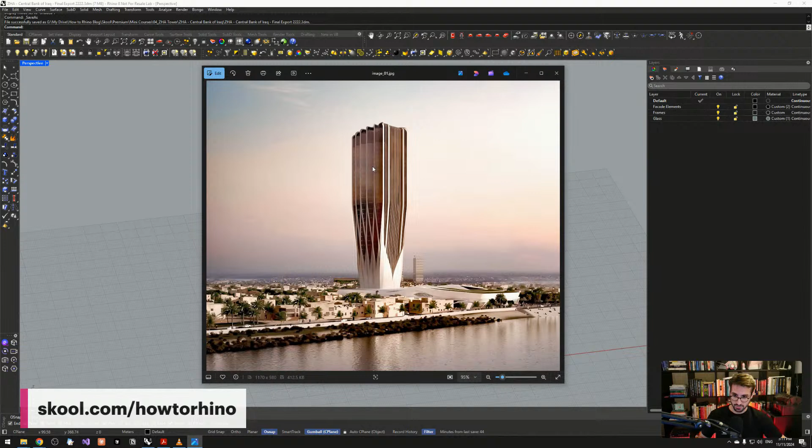Okay, so this is the reference project, as I mentioned. It's placed in Iraq. And this image is most interesting for our live session, because this part of the facade we'll try to recreate. Once again, we'll not try to recreate it, we'll use it as inspiration for our Grasshopper project.

And now I will try to explain first how we are going to create this one. This image is most interesting because we'll try to model something like this, and we'll position it all around the facade. So we'll not have this part here. The top part will be different. Maybe I can share the final result right now, so you can see how it will look once we finish everything.

So I'm going to open the final script. You can see our script will look like this at the end. And once we finish, it's going to look like this. Let me go to monochrome. So we're going to create this kind of form. Okay, and now I can start explaining each step. So what will be the first step to create something like this? As I said, this is not the same as the Zaha project.

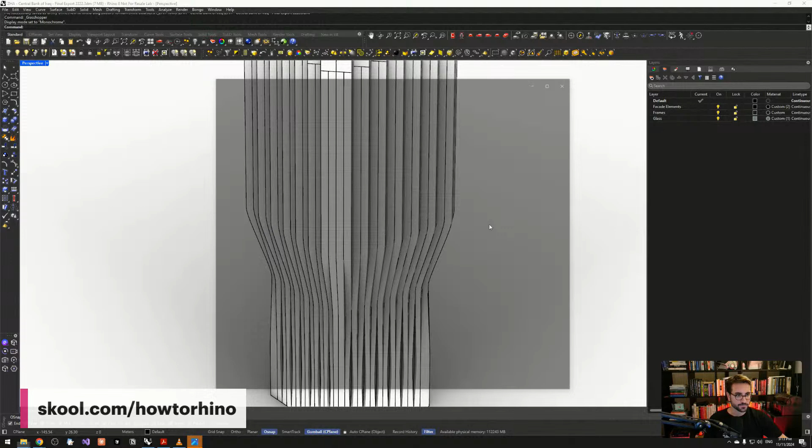Okay, so now I'm going to open the project once again. So, the reference image, and I will explain first how we'll try to create this one. First, as we can see here, we'll focus on just one element that will be multiplied all around.

Okay, so this is the element that we are going to recreate. So first, we'll try to create this element. And how we can create this element, I will explain steps here. So first, the logic behind it is to create this element. Then we are going to multiply this element on one facade. And once we create a single facade, we need to position it on 4 sides, right?

But once we try to position it on 4 sides, we'll have a problem with the corners. So you can see the gap here. So we need to fix these gaps. And in order to fix these gaps, we need to modify the corner elements. Once we modify corner elements, we can multiply this one facade at each side, and we'll get something like this.

After that, we'll scale the upper part. Then you can see the difference between these two. So from the straight lines, we'll try to make a fluid shape, to look more curvy. So we need to find a way how we can transform. In this one, we'll have a lot of issues here. I will explain later. And this is probably, I would say, the hardest part to create the facade.

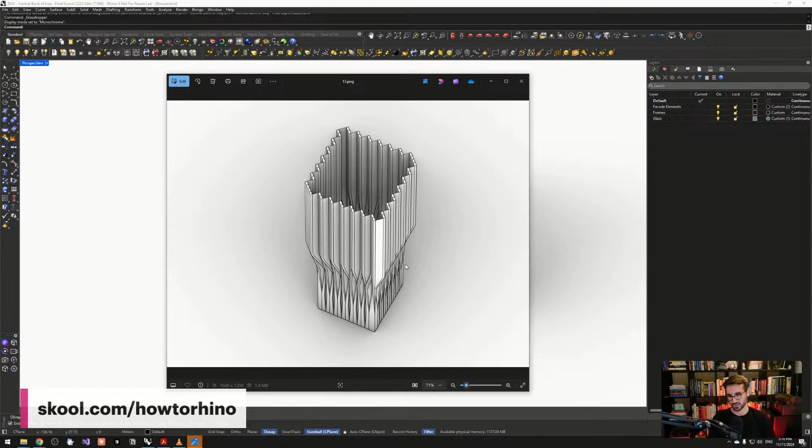So from this stage to this one, we'll have, as I said, a lot of challenges to overcome, and we'll work a lot with the data trees. We need to manipulate, and we need to create the pairs of branches. We need to sort branches first, then to create the pairs, and so on. I will get to that part later. Probably tomorrow we'll create the facade.

Then we need to create the top part, make a glass on the top, and we need to merge these glass surfaces in the next part. And once we merge, we can create the frames. Okay, so briefly, these will be the steps. Now we can focus on creating. So let me start here. How to create this single element?

Yeah, today. Okay. For today, we'll probably finish here. So this will be the end, the final geometry for today. So this part. And let me go back here. Now let's focus on how to create this element that needs to be multiplied on the facade. Okay, I will go back here, and let's focus on that element. Just find the right image.

As I said, this element we need to create. But to create this element, we need to find how this element is created. Well, actually, if we take a look, the rectangular shape is the cross section, but there are 5 different positions, or 5 different heights. These ones. So here these 2 rectangles are touching each other here as well.

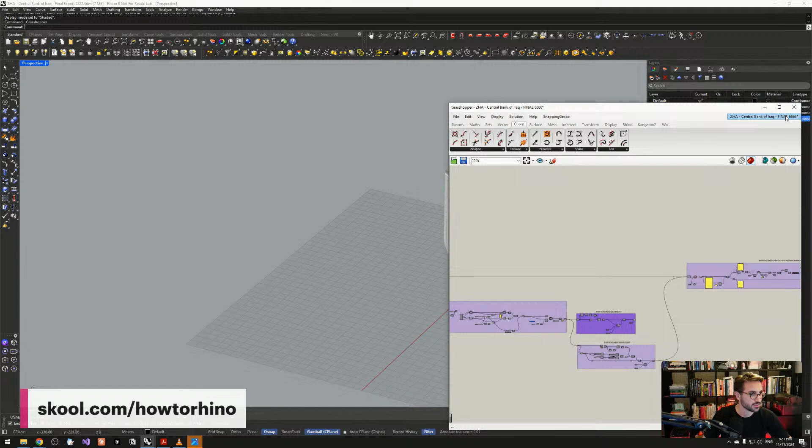Okay, let me go back. I will turn this off. Open Grasshopper. Open a new file. And first we need to create pairs of rectangles. Let's start with a single point. This point we will position somewhere in the space.

And now let's create a rectangle. I will use component Rectangle. And for the rectangle, we need 4 different, actually in our case, we need 3 different inputs. I will turn off draw full names. And let's create a plane. Plane will be at XY plane. And also I will add the possibility to rotate this plane if you want. Later on, based on this plane, we can rotate the whole geometry.

So I'll use Rotate Plane. I mean, this is not obligatory. You can do without this part, but I just want to add the possibility to rotate if you want. Okay. And let's set, I don't know, let's say 30 degrees. And don't forget to check here degrees. Okay. Once we create the plane, we need to set the dimensions for the rectangle.

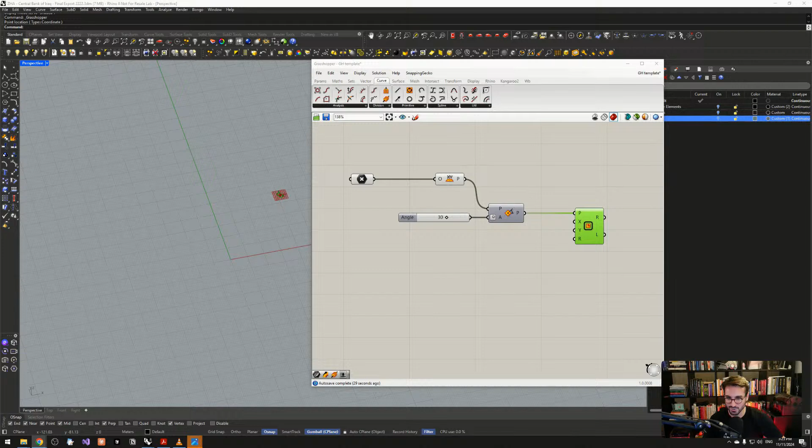We forgot to install here the Sunglasses plugin. Maybe we can on the break, to show the name of each component. Yes, this is what Walter said. Can you turn on Bifocals? Maybe you can install Bifocals from the package manager. Or Sunglasses. Yeah. No, we don't have Sunglasses here. Let's see for the Bifocals. No, we don't have. Maybe we can install this on a break, or maybe right now we can install. Yes, please. Thank you. Okay. Now give me a few minutes to install the plugin. Sorry for.

Okay. Here. Rhino. I prefer plugin Sunglasses over Bifocals. Login, download. Do you need to log in on your account here? Okay. Sunglasses. You need to restart Rhino. Okay. Yeah, we need to restart. But I will just save this project that we created. I mean, just a few components we created. Sorry once again for this.

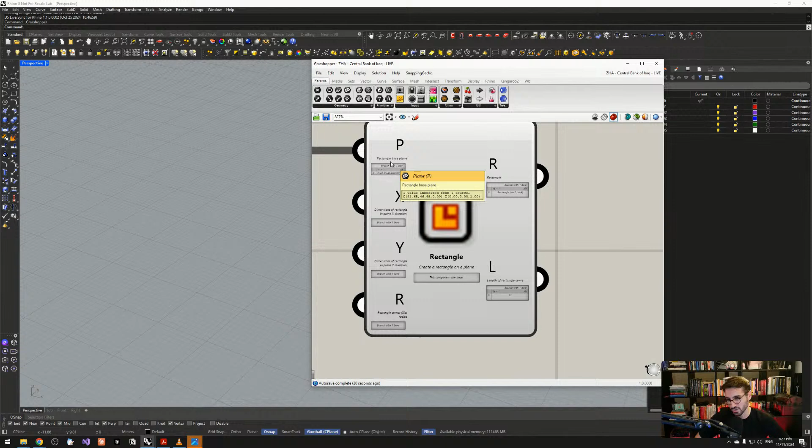Great. Now we have the names of the components, and what Walter said, you can zoom in here, and we have the possibility to see the number of branches, what is inside of the component, and also all the inputs and outputs. All right. Sorry, we didn't create a rectangle yet. We need to define the sides. So for the X and Y, we need to place a domain. So I'm going to Construct Domain.

If you want to keep this point as the center of the rectangle, what you need to do? Basically, you need to create a domain. So if you want to have a rectangle with the sides 5 and 4, you need to place here minus 2.5 to 2.5, because this point here should be in the center, and in total this dimension will be 5. Same here for the y. If you want it to be 4, you need to place the domain from minus 2 to 2, and this will be the rectangle. So in our case, first let's create a slider,

and maybe our rectangle can be 1 by 2. So if you want the dimension to be 1, you need to divide by 2. So I'll use Expression. For all of you who use draw full names, make sure to rename: instead of variable x, place just x here. And in the expression, I will type x divided by 2. Okay, and let's create a domain. In our case, this will be from minus 0.5 to 0.5.

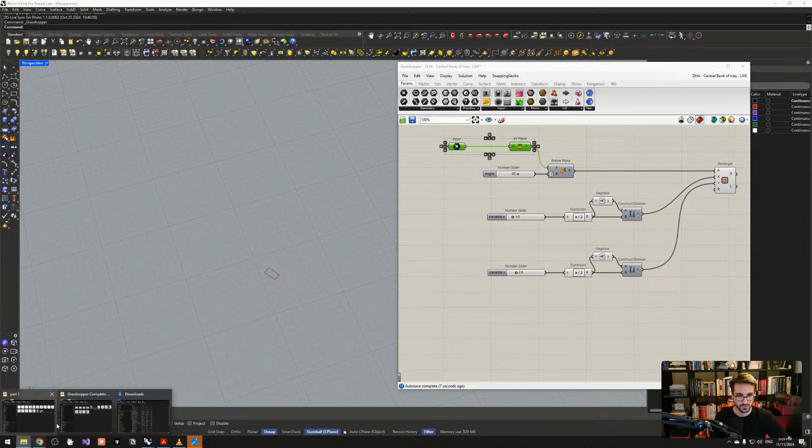Okay, and another dimension can be 2. This is the first rectangle. Okay, now, if you remember, let's go here. I need to create something like this. So another rectangle that should touch this one along the shorter side. So let's use component Move. We need to move this rectangle, and the translation vector we can get from here. So we need to Deconstruct this plane, and the vector should be y or minus y. All right.

So let's use component amplitude. So to take this vector, so y, and amplitude will be dimension, so larger dimension or length of this rectangle. This one. Maybe we can move this on the bottom, something like this. Okay.

So we created 2 rectangles. Now we need to position these rectangles at 5 different heights. Once again, why we're using 5 different heights? Because we need to have 5 different positions in order to create loft geometry and to create this element. But first, sorry, we need to combine these 2 rectangles inside one data tree. We'll use entwine, and now we should use move. So let's move this.

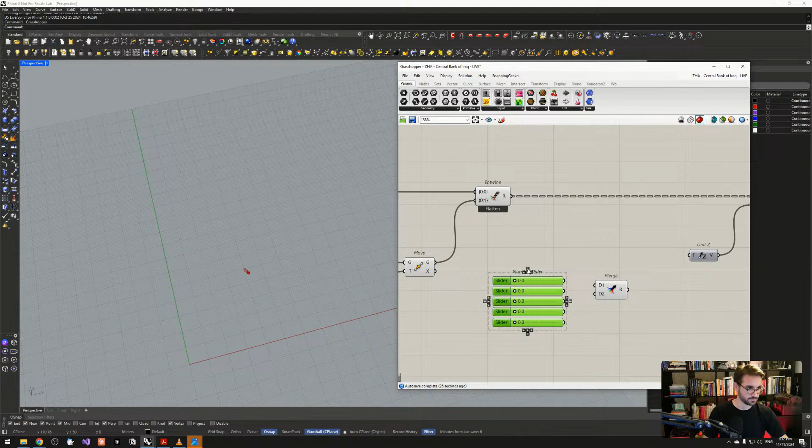And how we can move them at 5 different heights? We need to use, of course, unit z or vector z. Let's create a slider. Of course, we need to have 5 sliders for 5 different heights. Let's align them. So one option is to, let's say, second height will be, let me check, I already have prepared here, so 20.

One option is to do something like this. So this is first, second, third height can be added 30 to the previous one. So one option is to use addition and to create like third height. Then fourth height can be used to add on the previous one second value. So this is one logic, but logic that I prefer, with less components, is to delete this one. So I'm going to place these guys inside one list.

And instead of using addition to some values with the previous value, we can use mass addition. And what we have here in the partial result, basically, it takes the sum before, let's say, index 3, which is 20, and it adds value 30, and we get 50. Then for the index 4, the sum was 50, and it was added 30. So similar with addition, but with less components. Okay, and these are the heights that we need to place these guys. So this was the second step.

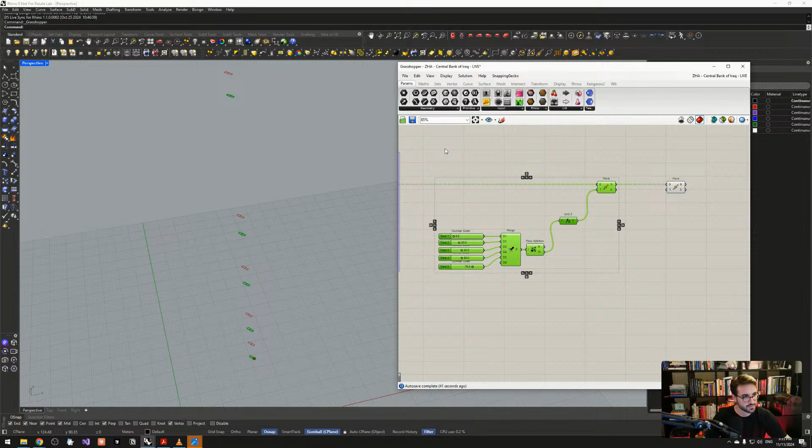But sorry, I forgot to make groups, so it will be easier for you later to find what is each step. So this one will be, let's say, create pair of rectangles. Okay, first step. Second step, to set heights. I still need to use this keyboard. Set rectangles height. This part here.

Okay. Now we have a step to create a gap for the third pair of rectangles. So once again, I need to use move, and here we need to have 5 different amplitudes, but actually 4 among 5 amplitudes will be 0, and only for the index 2 we'll give an amplitude which is not 0 in order to make a gap. So let's create 5 different values. Maybe I should turn this off. Only for the index 2, this part here, we should add the amplitude.

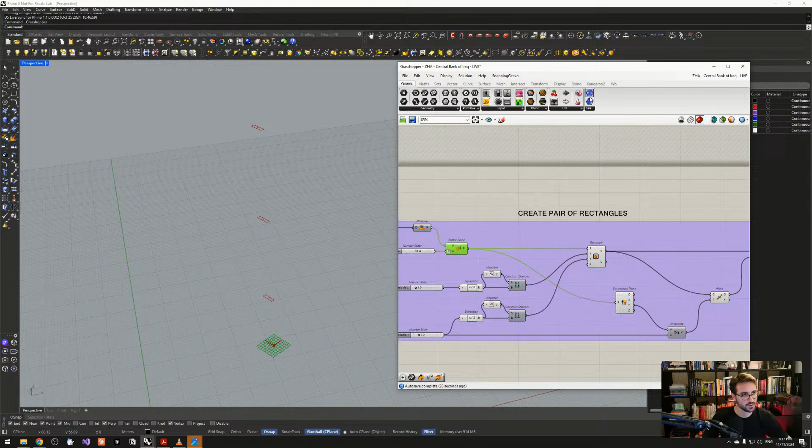But we need to know first what is the vector, and also some rectangle should be moved by 2, another rectangle should be moved by -2. Okay, vector, we can take a look here, should be along x or -x from the base rectangle. Maybe we can create here remote sender. We'll use it later a lot. So I will call it base plane.

And we can use receiver, base receiver, and I'm going to deconstruct this plane and we'll use X. So amplitude will be X. This will be the amplitudes. And what we have here, one set of amplitudes we need to place in the branch 0. Another set of amplitudes will be set in the branch 1, which is negative. So -2 and +2.

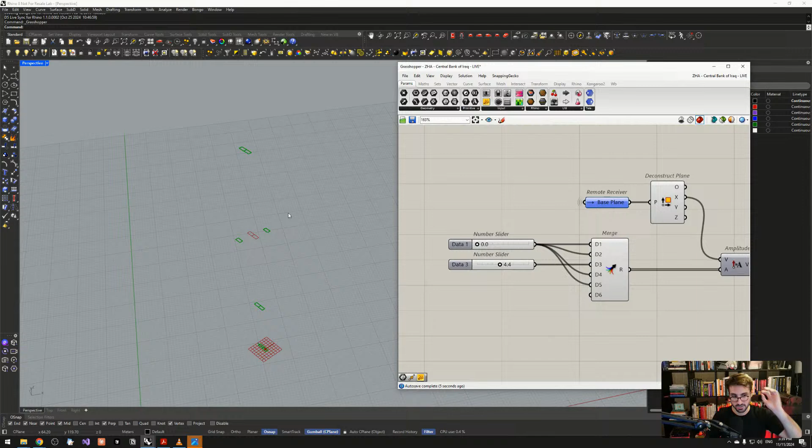So let me see what we have here. Actually, we already have a vector. Sorry. So one vector is positive, another vector is negative. And if we place it in the move, we make a gap. And with this slider here, you can define the gap between these two rectangles at the position 3. Is everything clear so far? Let's call it gap.

Create a gap for the third pair of rectangles. Everything is clear, I guess. Now we need to rotate planes, rectangles, and pairs of rectangles at position 0 or position 1 and position 2. There is no position 0, just index 0. Okay, I will turn off all of this.

Before we rotate these rectangles, I want to show you why the vector that I mentioned here is important. So we create gap. This is so far what we did, and we'll take these two pairs and align them to this vector. Now I will explain why this vector is important.

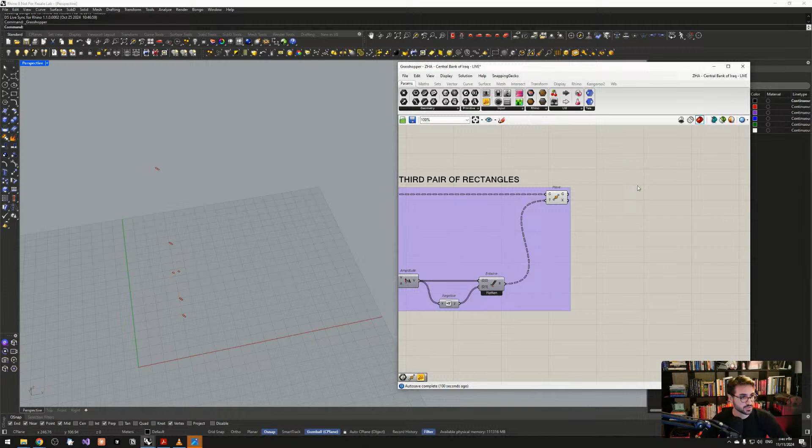Let me first create a loft here. I will make a brep, right click at the loft options, and set it to straight. Okay, and I will make it. Let's move it here. Later on, once we multiply this element on the facade, this vector we are going to use between this point and this point here.

So let's make a group once again. This will be the logic for how these elements are positioned on the facade. So once again, between these 2 points, or you can use also - let me just delete this one. Yeah, you cannot use this one.

So this is the vector that we need. But in order to create this vector, we need to know these 2 points. So first I will extract rectangles, extract their corner points, and we'll need to find the logic to locate these 2 points. This is the data tree that we have so far. I already made a post on Skool and on LinkedIn about this new feature.

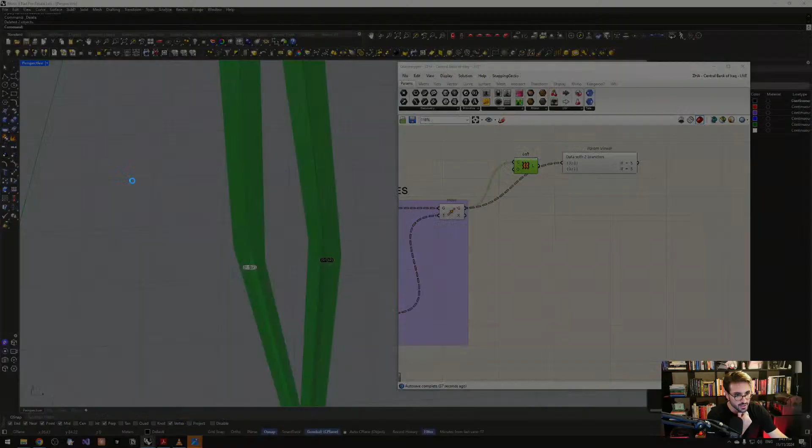At Rhino 8 version, I think since 8.12, there is a new option to preview in the Param Viewer. What it does basically is show the path of the geometry in the Rhino viewport. So we need to extract - I will take these two rectangles and extract their corner points. As I said, I need to find the logic to locate this point here and this point here in order to create a vector. Later on, this vector will be used to align these two sets of rectangles.

Okay, to locate these two guys, I will use split tree.

Can that font be scaled up? You mean font for this one? For the path or for the components? I didn't understand the question. So for the path, for this one. Good question, if you mean for the path - Rhino viewport font for the Param Viewer. Rhino viewport font, okay, this one. I'm not sure, honestly I'm not sure about this one. Can we scale up this font? Probably yes, but I don't know the way. But I hope it's kind of visible.

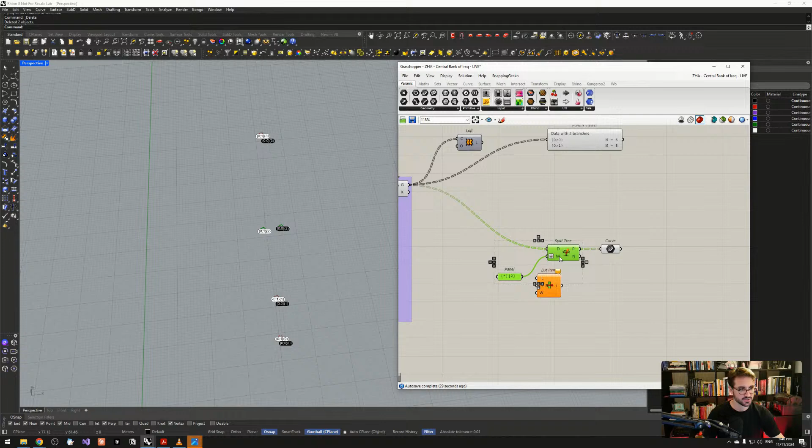In the positive output, we have these two guys. Or actually, now I'm thinking maybe we can - sometimes I'm overcomplicating, maybe we could just list item in this case. We don't need to preserve the position of this guy. For the rotation of these two pairs at height 1 and 2, we need to preserve. So here we need to use split tree, right? So here I will place 0 and 1.

Why? I need to explain you why. I think I didn't explain this part well. How do we view those fonts?

Just preview and Param Viewer. So if you have Rhino 8 version, Rhino 8.12 or later, in the Param Viewer there is an option - right click and check preview. So if you turn this on, you will get the paths visible in the viewport.

Okay, why are we using split tree? Because I want to rotate these two sets of rectangles, but I want to preserve their position in the data tree, because later on I want to graft them. It is visible here - once we rotate them, I want to graft them, but I want to keep them at the same position as they were before. So that's why I use split tree, and here's how their position is preserved.

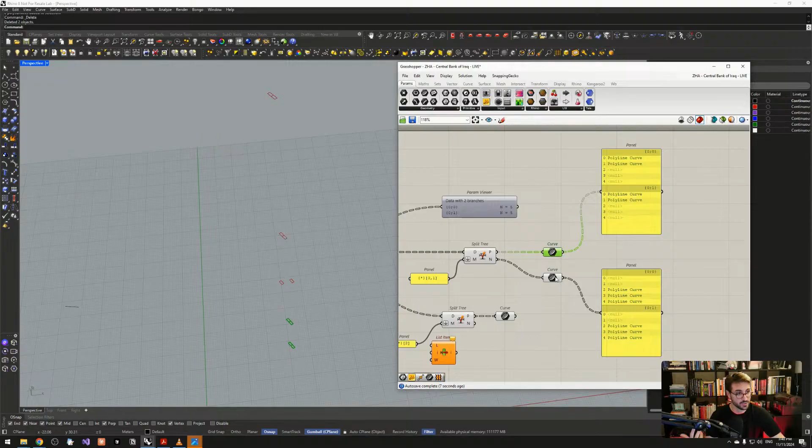It's preserved like this - it keeps the same data tree structure, but we have null. And for the negative, for the rectangles that we don't modify, it will be the opposite. So once we take these two pairs of rectangles, rotate them, and place them back here, they will have the same position. That's the reason why we use split tree. Here we don't need to use split tree - we can simply use index 2, because here we just need to find the vector. So that's why I said we don't need split tree here. Okay.

Once we create this, once we extract these rectangles, let's find the logic how to extract this point and this point. First, I'm going to use discontinuity to extract their corner points.

Maybe I can explain the logic of what I'm going to do in the next few steps. Once we extract all the corner points, I will find the average point, so I will flatten all of them into the same list and find the average. That point will be here.

Let me take this another color. So we need these 2 points. How can we find these 2 points? I will calculate the distance for the left, from all the points on the left to the average, and all the points on the right to the average. A point which is furthest from the average on the left is the point that we need. So this is how we can find the point on the left.

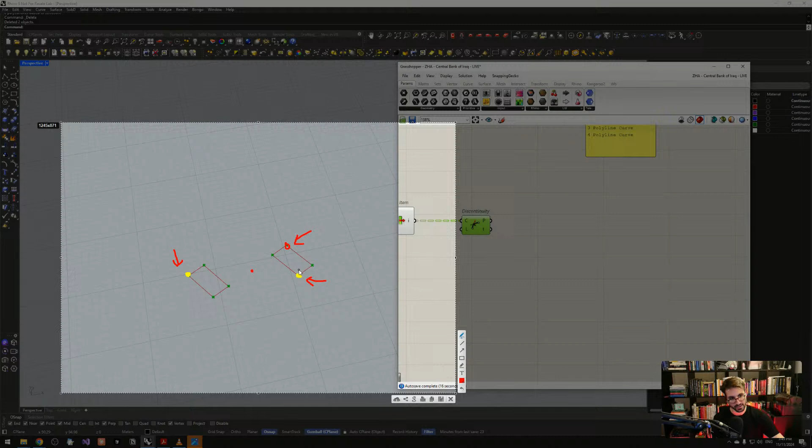Point on the right will be a bit more difficult, because that point is not furthest, but it is either second or third distance. So it is either this one or this one. I will extract both of these two, and later on in the next step I will explain how to find exactly this one. So first, let's flatten the list

and find the average. So this will be the average, and now we can calculate the distance. Here we have the list of distances, and I'm going to sort these points based on their distance. By default the order is ascending, but if we reverse the list, it will be descending order.

And if you remember, here we have two branches, so let's first extract this one. Maybe we can explode both of these at the same time. I will use explode. So if we extract the first item, or item with index 0, we get this point, because this point is furthest from the average.

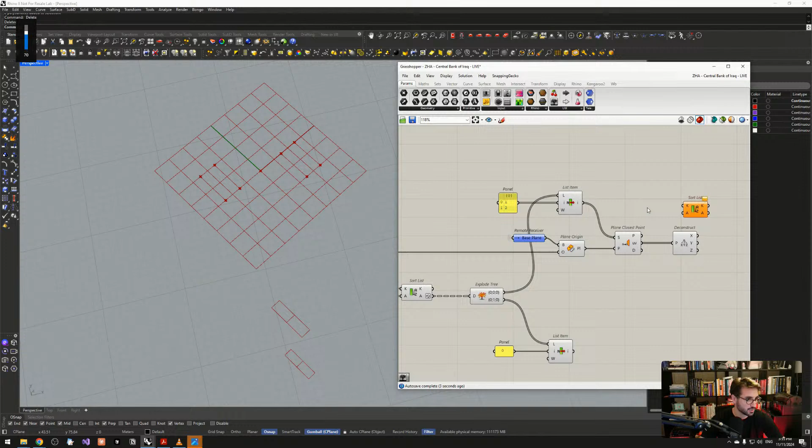So we can deconstruct these UV points and sort them based on their y coordinate, and we'll get this one because that one has the lower y. So let's deconstruct UV and sort these guys based on the y, and I will extract the item with index 0.

Okay, so we managed to extract the points that we need, these 2 guys. Once we extract them, I will use the component vector, 2-point vector, this one, because I will use this vector. Maybe I can visualize it if you want with a line.

We can just create a line. So I'm going to use this vector to rotate pairs of rectangles at height 1 and 2, and they should be aligned with this vector. Okay, it is now clear how we managed to extract these 2 points.

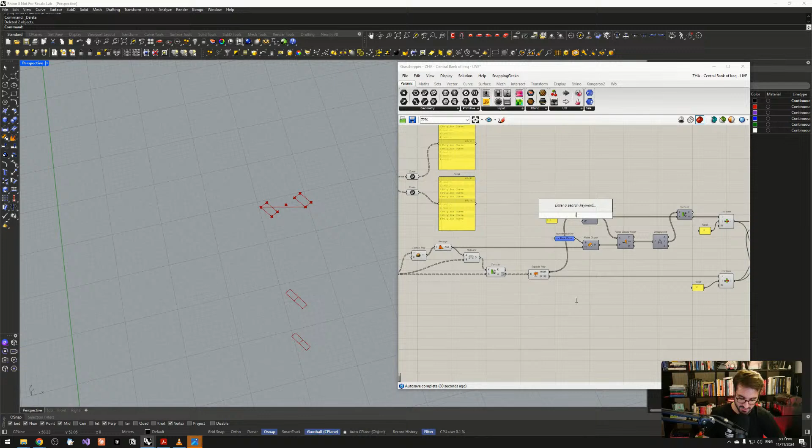Ethan is asking about using the list item. I don't think so. This is what I did while creating this Grasshopper definition. Let me show you what issue you can get. That's a great question, I will try to explain and answer this.

Let's use list item, and we pick this guy here with index 1. And let's create the line. But let me show you what will happen if we change, if we rotate the position. You can see how it's switching between these two.

You can see what was the problem, because these two share the same distance. If you remember, Grasshopper sometimes shows us either one or another item, and this can be a problem. Sometimes it's this point, but sometimes it's another point.

So that's why every time you sort some kind of branches, items, points, whatever, you need to find good logic how you want to sort. Sorry, I didn't explain well. Try to use list item only when you're 100% sure that list will not be changed if you modify some slider that affects the list or the organization inside that list.

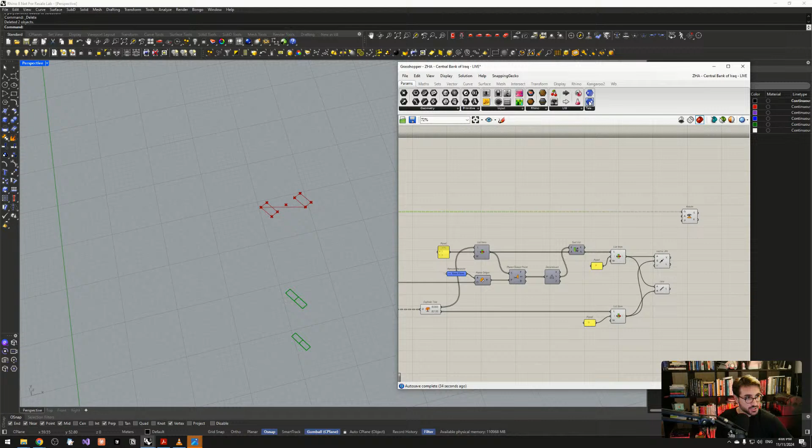Rotation plane is the crucial part here. How can we create a rotation plane? Let's use this. Sorry, I need receiver, this one, and I will use base plane.

Actually, maybe we can take this guy. Oh no, sorry. So we need to align. This is the position of the rectangles, so we need to align them with this line that we created. So you can see why the axis of the plane needs to be aligned with this vector.

So let's first create the plane to align, I will use the component plane align plane. This one. So we have a plane, and we have a direction, the straightening guide direction. Basically, this is the vector based on which our plane should be aligned. But what is the problem here? It is going to align the x axis of the plane, but we need to align

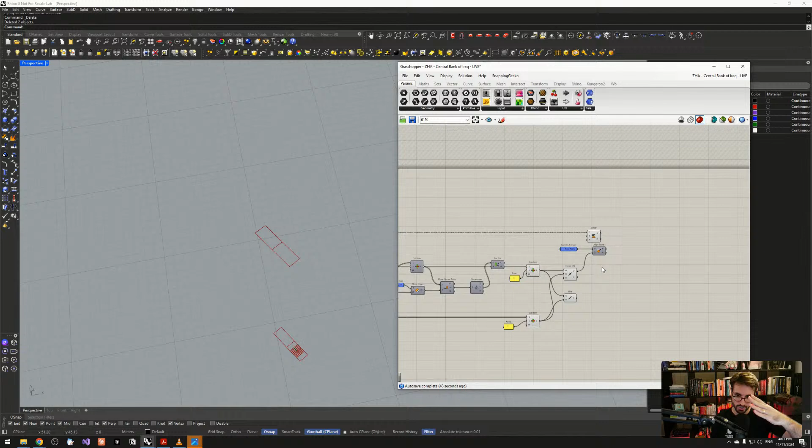So simply we can deconstruct our base plane and create. Let me just show you one way. And then we can create another construct plane that will have y as x and x as y, like this.

But actually, I will show you first here what can be a problem. We just first see, no, we need, so this is plane and this is direction. Okay, and we get an angle. Let's go to top view. So we need to take this one. Oh, sorry for the sketch.

These guys, so we have plane, and we need to align it like this. This is what we did, and we get the rotation angle, so this will be rotation angle, and the rotation plane can be this one.

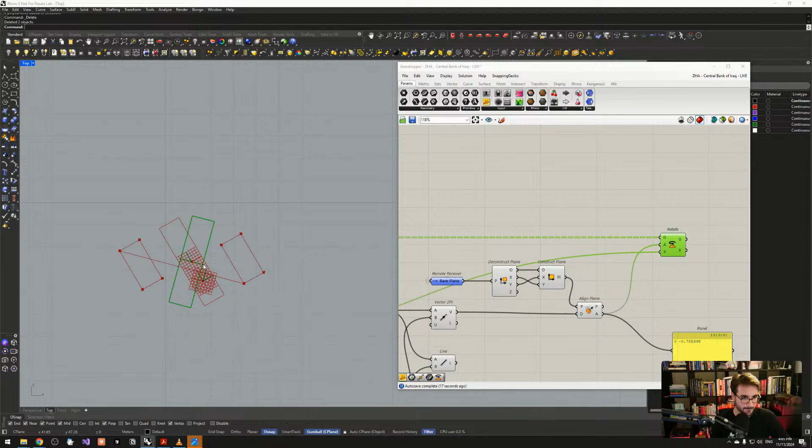But let me see. Let me see, yes, I know what the issue is. Let me just see once again. So turn this off.

So we take this one, but the issue is we need to flip x. So x should be on another side, so x should be here. The problem was the vector was

created. I forgot to visualize this vector, so I will use this vector. Let's use this as origin. So this was our vector to be aligned, so we align along this vector. Simply, it was rotated, so this vector was rotated to this one here.

Let's see what we got if we place it back to our list of rectangles. So we have rotated rectangles. Okay.

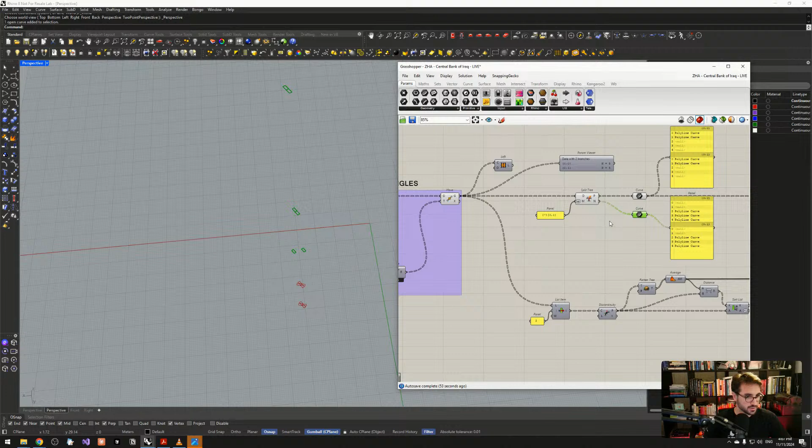Something is turned. Okay. This is okay. I need to turn off this one. Turn off. Turn off. All right. And if you use combine this one with rectangle that we didn't modify, and if we loft, yeah, it was flipped by 180 degrees, and I know why. Let's go to the top view, because our vector that we reference here is flipped.

So this vector should be like this, and our vector that needs to be rotated is this one. So this is vector that we need to align, and it will be aligned here. So we need to flip these two. And now I think we should get the right result. Let's turn this on. Yeah. Let's bake it. I'm going to move it on the side. Yeah. Let's group and see how it looks. Translation vector is between these 2 points. Okay.

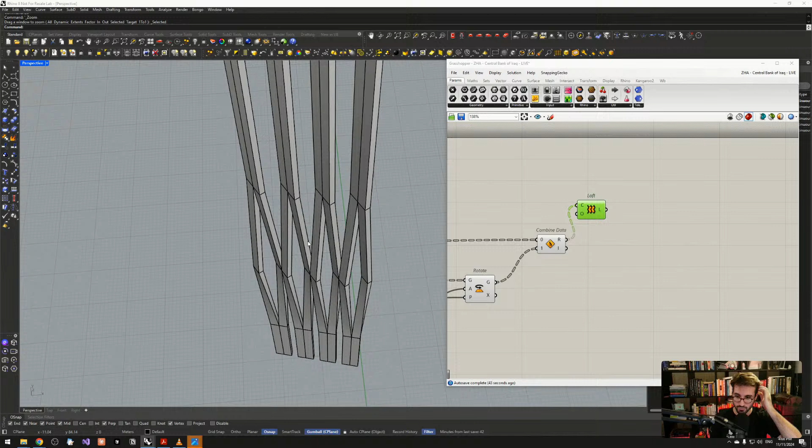Is this part clear with the vectors? If something is not clear, I can go over once again. So basically, it is just important which vector you're going to choose to align. So what will be the base vector and what will be the alignment vector. So accidentally, I flipped end and start point to the 2-point vector. So that's why we can get a problem. So it is important to set start and end point correctly, and then also to set correctly the alignment vector that we had here. Maybe I can visualize this alignment vector as well.

So basically, this vector was aligned to this point, and we calculate the angle, and based on this angle, we rotated first 2 pairs of rectangles. Okay. No questions? Okay. Let me give a name to this group. Let's call it rotation of first 2 pairs of rectangles. All right. Let me open sketches. So this is so far what we have.

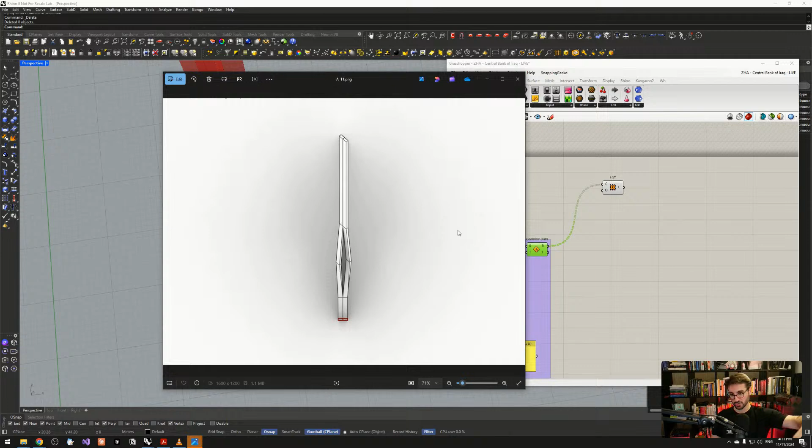In the next step, we need to take pairs of rectangles at the first height, so on the bottom, and we need to stretch them. And the stretching position will be based on these 2 vectors, these 2 points that we extracted. So basically, we're going to project them on the bottom, and this will be the ending position of these two rectangles that we need to stretch.

Group names. We have group names plus sunglasses readable when zoom out. Menu option. Not sure. Group names plus sunglasses readable when zoom out. You mean for the sunglasses, I guess.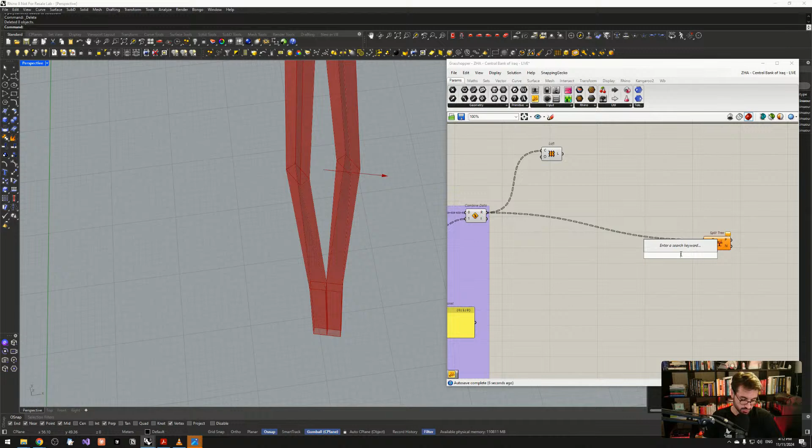Okay. Now we need to extract these 2 rectangles. Once again, I will use split tree. And we need to extract. So we need to place here a splitting mask. Once again, asterisk and then index 0. Oh, sorry, I forgot to type this one. Asterisk 0. Okay. Here we have rectangles that we need to stretch, and we'll keep the rest unmodified. So we'll focus only on this one. So what we need to do?

Let's take these 2 points, and I'm going to project them on the base plane. So there's component project. This geometry, project them. I will use our base plane. So first, I will type stretch component and see what is required to stretch. So we have base geometry. So this geometry needs to be stretched, and we need these two inputs: stretch axis and length of new stretch axis. So we need baseline, and we need lines. We need to add here line that this baseline needs to be stretched.

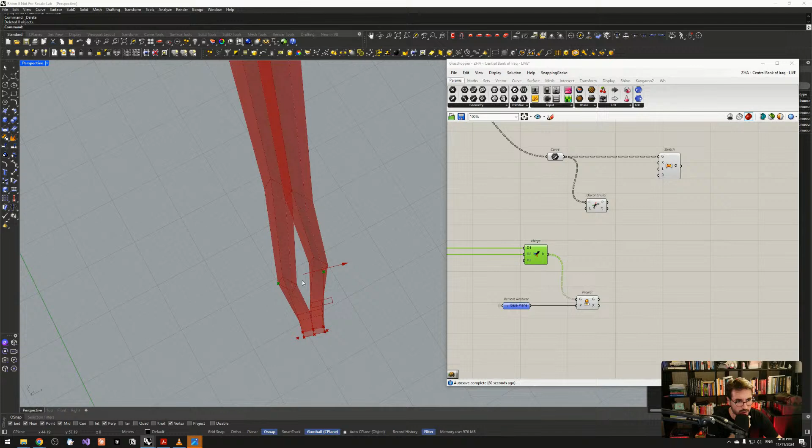So baseline we'll get if we take... So we need to once again extract all these corner points, and we need to find point which is closest to middle point of these 2 guys. I'm just going to top view just to check something. Something is weird. Let me just check. I need to check something, if I created it right. So yeah, this is right vector. Yeah, this is correct.

Okay. So we need to take this one. We need to project. Yeah, this is what I did. So let me just see something. Yeah, this is parallel. This is all correct. I need to check something. Please give me a second. Feel free to ask if you have any questions about what we did so far. I'll try to answer while I'm checking this one.

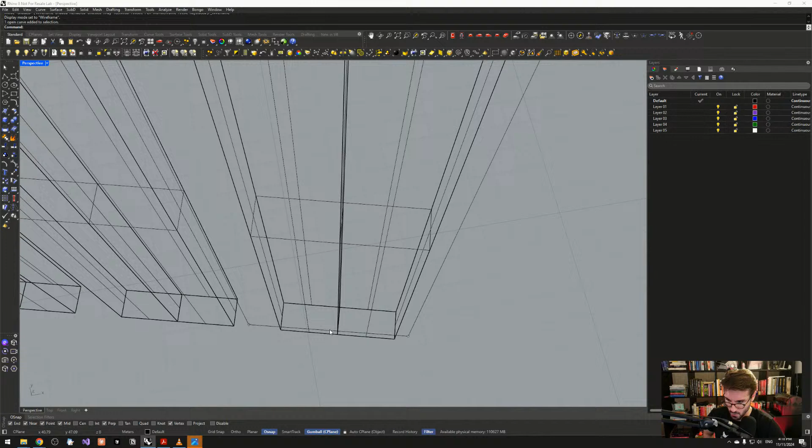Something is, we have some issue here. Yeah, definitely we have an issue. And I'm just checking why. Okay. Sorry guys for this one. When you have quite a big script, sometimes this kind of issue happens. Give me just a moment to troubleshoot, because what I'm checking, this line should be aligned with our edge. But for some reason it is not. So we should get line like this.

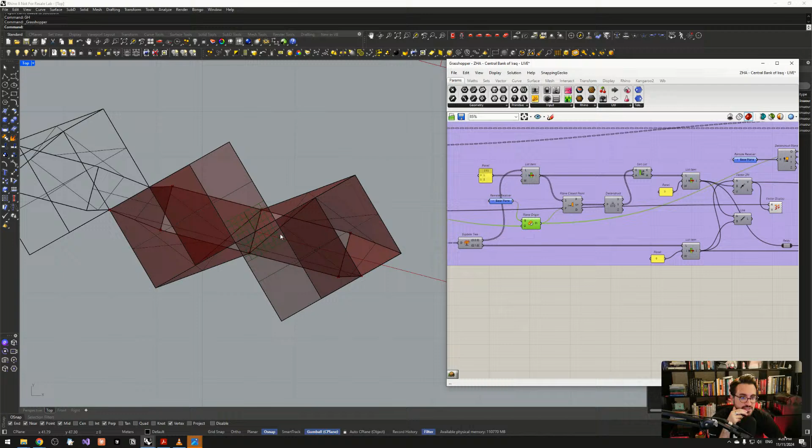Probably I know what can be a problem. I think I know. I think the rotation angle, here, what we use, rotation plane, sorry, was an issue. So what we use here as a rotation angle, we use this one here, right? But rotation angle should be... check. Rotation angle is an issue. So rotation angle we use as a center of these two, but rotation angle should be in the middle between these two lines. Let me just check this part.

Yes, that's right. I mean, the final geometry is similar, but the rotation plane should have its origin in the middle between these 2 points that we extracted. So, sorry, midpoint, this one. So in the middle, and I will use this guy.

So let's use plane origin. If we take this one as a rotation plane, you can see how just a little bit it moved the whole geometry. Now it's correct. Okay, sorry for this one. And now you can see how these 2 points are aligned with our edge.

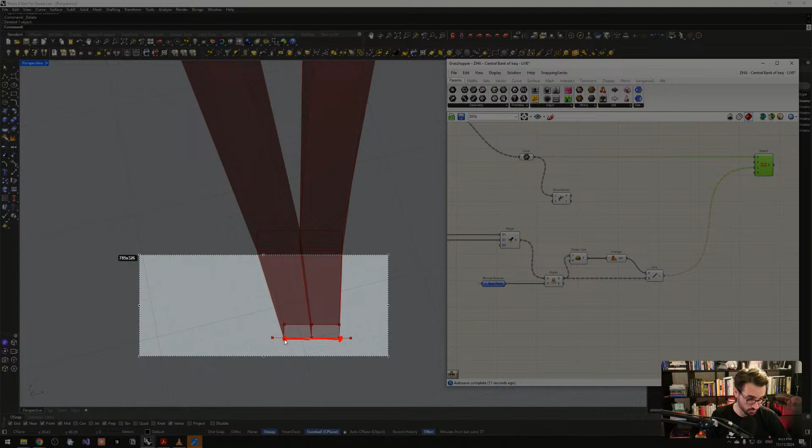So we need to know how to extract only these 2 points. Basically, to extract these 2 points, we can find a closest point. Actually, I will take these points. Points to search from will be this input, these 2 points that we project on the XY plane or base plane, and cloud points to search will be control points.

What does it mean? We'll take these 2 points and we try to find what is the point among these 2 sets of points which is closest to these 2 guys. In our case, this point on the right and this point on the left. Once we get these 2 points, we can create another set of lines. And these lines will be stretch axes. And we get pairs of rectangles at the bottom.

So we're quite close to getting our final shape of vertical facade element. Once we stretch, we can combine. Let's combine data, this one, and now we can loft. Oh, here we have an issue. Yes, I know what the issue is. We need to be careful with the data tree, right? So here we have 10 branches, but here we have only 2 branches.

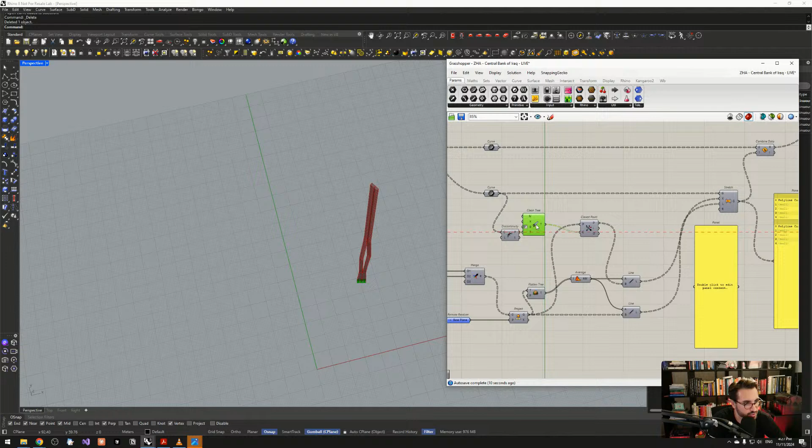So we need to trim the data tree. If we trim, let me just check, 0.01, axis. Invalid line. No. Let's focus here on the data tree. We have 10 branches. So maybe we can just clear data, uncheck flatten, clear data. And here we get what we need, only 2 branches. So simply I just clean the data tree, and now everything is fine.

In the stretch we get 2 branches where only index 0 has a value, others are null. And in the other one we have the opposite. Once we combine, we get 5 polylines inside each branch, and we get the final position of our vertical element. If we bake, let's see what we get. Later we are going to multiply, and we are quite close to getting one side. So this is what we get so far.

Okay, we're going to make a short break. Let's say a 10 minute break. After that, we are going to multiply this one along one line. So to create a facade, we are going to modify corners and, yeah, create the facade.

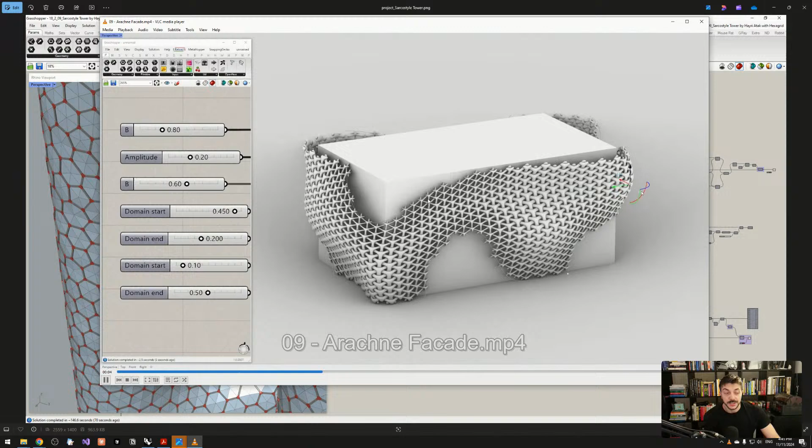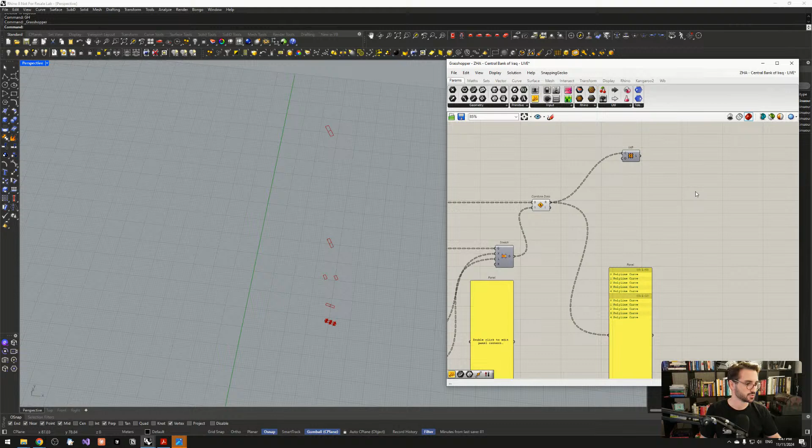So I will use the component Linear Array, this one. We need 3 different inputs: geometry, base geometry, direction, and number of elements in the array. Direction will be the same direction that we have here. This is direction. We can flip this direction, maybe like this. It's up to you. I will take a vector container, and I will type here array direction.

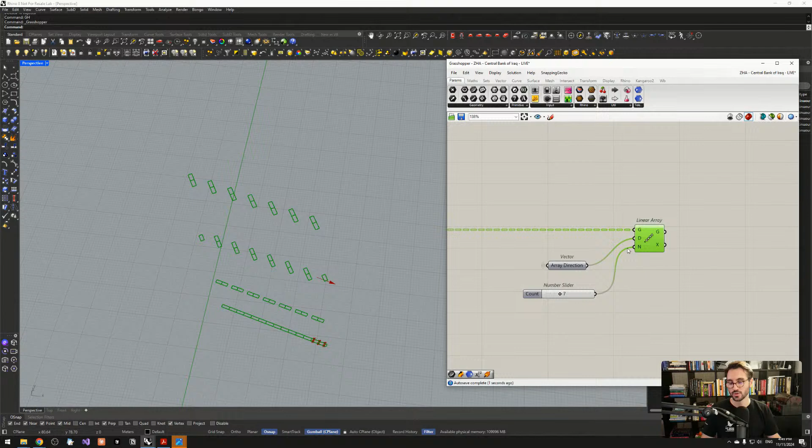In order to see how we call this component, you can turn off this icon here, and we'll have only the name of the component. So this will be array direction, and I will use hidden wire. This will be direction, and here we need to define how many elements we'll have along this direction. Now I will show you what we get in output. In output, we get a data tree that we need to modify.

Yeah, I checked this one. You can see here big names, nicknames on groups. Maybe Richard means, let's try like this. No. This one. Okay. Oh, cool. I didn't know that. So instead of placing the name, we can just copy this one. Thank you, Richard, for this one.

And if you zoom out, you can get the name. Create a gap for the third pair. So this is how our group is named. Copy, call the group like this. And let's copy this one. I forgot to name this group. In this group, we rotate. So I'm going to call it: stretch the first pair.

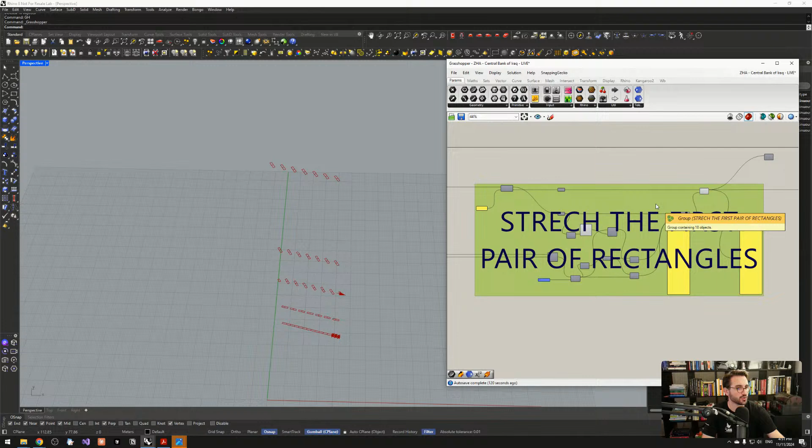The first pair of rectangles. Okay. Stretch the first pair of rectangles. Okay. All right.

So these polylines are placed in the same branch, but actually I want this one here to be in the same branch. So we need to modify. In order to modify this data tree, I will use Path Mapper. So let's take the output from linear array and connect it with the Path Mapper. First step is to right click and check here, create null mapping.

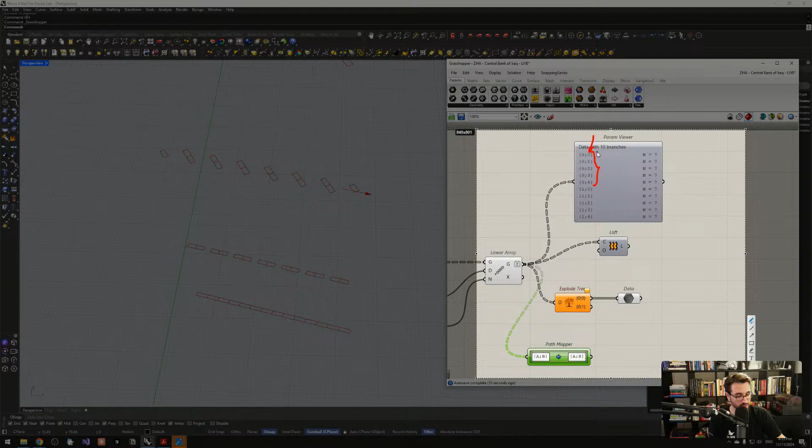So it will give you the current organization of the data tree. So A and B, which means we have only a 2-level data tree. You can see left and right, so A and B. But we need to have 5 items in our case, where each polyline represents a different height. But our second branch level has 5, from 0 to 4, which means this second branch level should actually be the number of indices inside each branch.

So what does it mean? We need to take this B and place it as an index, not as a second branch level. You can use any letter you want. I use I, which represents index, and the index is placed in the brackets, not in the curly brackets. And we need to swap the position of B and I. So here should be I, and B should be the number of indices. So we should have 5 items in each branch. Let's see what we have. So 5 polylines. And if we try to loft them, now we get what we need.

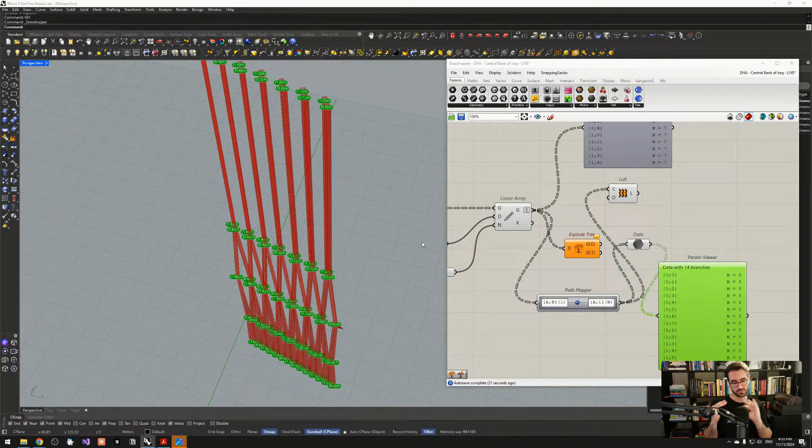And if you want to visualize, you can visualize with Param Viewer. Okay. So this is how we manage to multiply this element on one facade. If you want to position this part of the facade for all 4 sides, we need to use a mirror. Okay, delete this one. Let's call it multiply.

Okay. And what can be our mirror plane? So the mirror plane should be aligned with this edge. So this will be one mirror plane on one side. Oh, sorry. One mirror plane, and another mirror plane should be aligned with this edge here. I'm just showing you what the mirror planes should be.

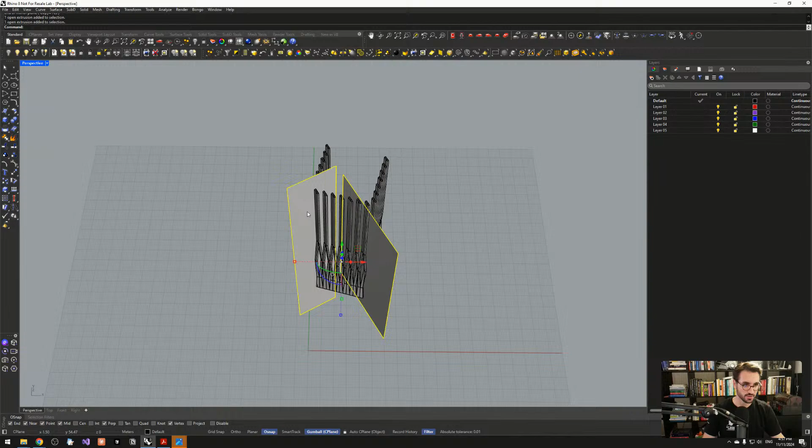So if we take all of them and mirror them, and mirror this one on the other side, we'll get these gaps that I explained at the beginning. So we're still not ready to mirror them. We need to modify this element and this element. These corner facade elements we need to modify somehow in order to fill these gaps on the corners. So let's go back. I will delete.

So we'll keep position. Right now we have only polylines. I will stick to polylines until we get the final position of the polylines, and after that we can use loft to generate B-reps. But as you can see here, polylines at height 3, 4, and 5 are okay, but the problem that we have with the corners is related to polyline index 0 and index 1. So these two we need to modify, and these two.

So first, let's extract the polylines placed at these 2 branches. Right now we have 14 branches. It's okay. But let's extract the first branch and last branch. With Tree Statistics or with Param Viewer, it's up to you. You can extract all paths, and I need only first and last. So I will use List Item. We need to extract item 0 and -1. Uncheck multi-line data. And here we have these 2 paths.

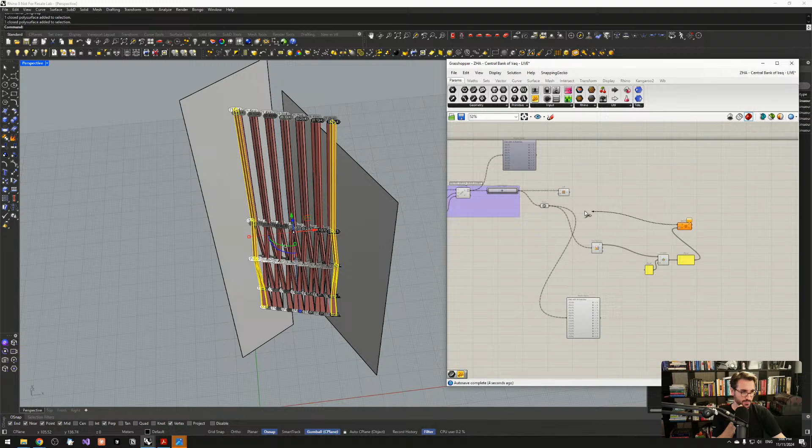These two we need to place at Split Tree, because I want to modify the content inside these branches but preserve their position in the data tree. So that's why, once again, we use Split Tree. Okay. Let me delete this one. So here we have polylines inside the branches: the first branch and last branch in the data tree.

But we don't want to modify all the polylines. We just want to modify indices 0 and 1. Which means, once again, I will extract them. Let me just think if we need to use Split Tree. Yes, we'll use Split Tree, but I will get to that part. First, let's move. Let me just select this one. So this one will be unmodified, and let's move only these two. Right.

Let's find the logic first. I will explain the logic of how we want to modify these 2 polylines. I will give you a sketch here. So this is what we have so far, and I will take index 2, the polylines at level 3, to find mirror planes.

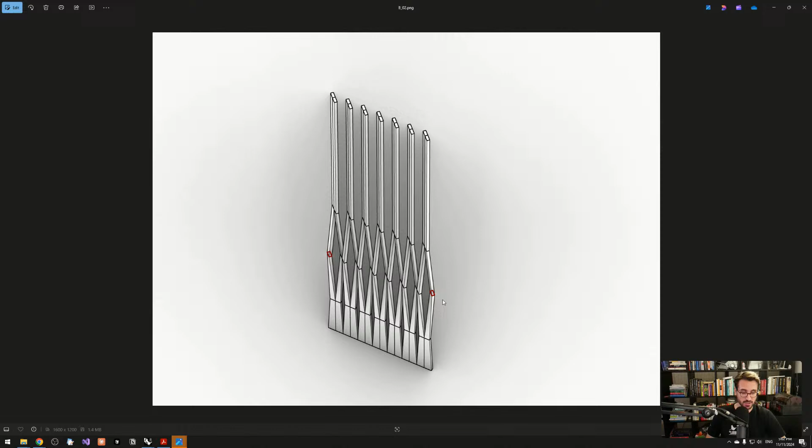So we still don't have mirror planes in our Grasshopper file. Mirror planes we get from these 2 guys. One is aligned with this edge, another one is aligned with another edge. These guys need to be modified.

What we need is to create a plane. Let's focus on mirror plane 1, I'm going to zoom in this part. We need to take these 2 points and these 2 points and project them on the mirror plane, like this. Once we project, we get new control points and new polylines, and we can create this corner B-rep.

And the same on another side. This is from the other side, another mirror plane, and these two sets of points we are going to project on the mirror plane to a new position, and based on these new positions we'll have polylines and create the B-rep, and we get these corner elements. After that, we can mirror.

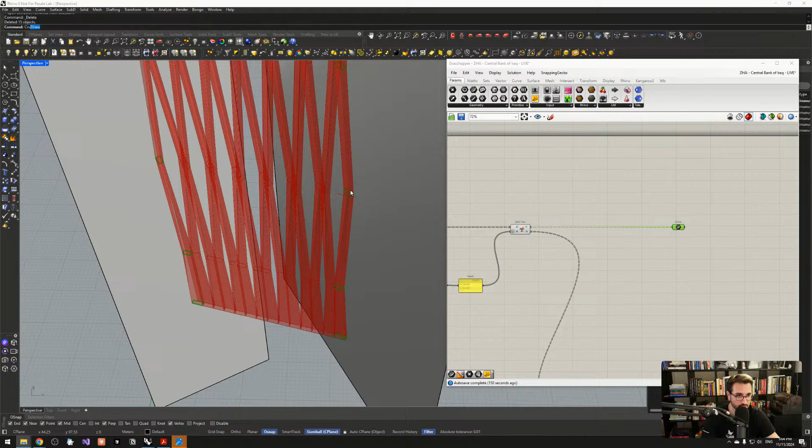Okay, first let's create mirror planes. As I explained, we get them from the items position at index 2. So list item, and I will type list item 2.

The easiest way is to use bounding box for each one. Bounding box orientation plane will be our base plane. And simply with evaluate box, we can extract positions. So we need to extract this position, either point, you can use any point at this line, so from 0 to 1.

So what I want is to move the plane along X. This is the point that we need. And the mirror plane we can get if we take this plane from the evaluate box and deconstruct it. So this will be X and this will be Y. So unit Z will be Y, and the Y direction of this plane will be X. Basically just deconstruct plane, and construct a new plane with the same origin, Y, and unit Z. So this is one mirror plane.

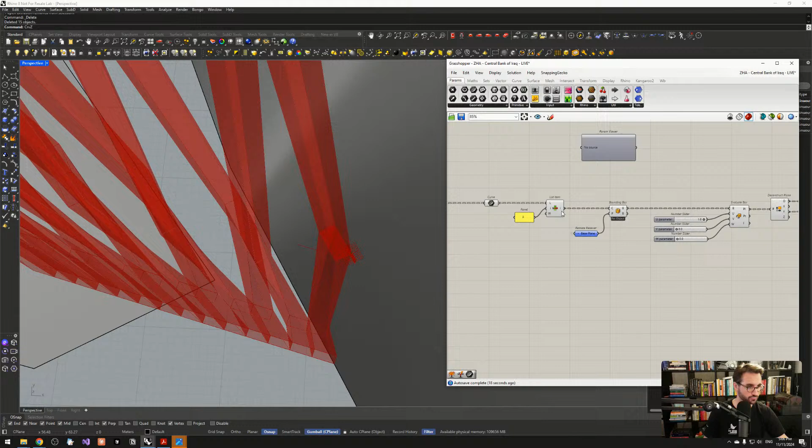Okay, now I forgot to extract properly. Here we have two branches, but I focused just on one, I didn't focus on another one. So that's why we need to explode the data on the explode tree. First explode. Yes, explode, so this one is okay. But we need to have another plane.

So I'm going to copy, and this one will have another, we need to set another values to evaluate box. So this will be 0. Yeah, actually this one, no, should be this plane, which means Y should be 1. We get this plane, and you can see what is the problem: not Y, but X will be X of our mirror plane. So this is the plane that we need. Okay, another mirror plane, great.

So we managed to generate 2 mirror planes. Any questions so far?

Wait, we are lagging 10-15 seconds. But I guess we don't have any questions. No questions, I hope somebody is following this live. We are not alone here. Are we alone? Clear, okay, thank you. Oh, Richard is still with us. Okay.

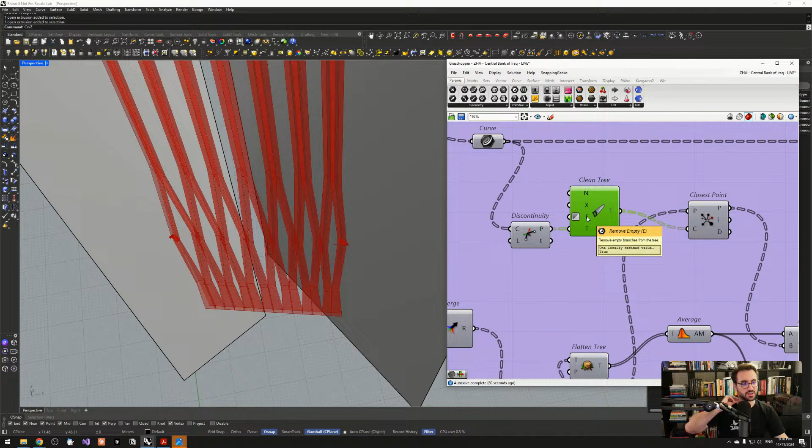I was following until I got stuck. Feel free to ask, where did you get stuck? On the stretching part. Okay, but at which point? So did you set correctly the stretching line, stretching axis, and how is it called, another input? Length of a new stretch and stretch axis. So make sure that these two lines you set correctly, and make sure that you set the data tree correctly, because here we should have only two branches. Did you right click here and check invert? Because here by default it's set to false, but you can create a toggle and set to true, or you can simply right click and click on invert. So to invert, default input was false, now it's true. Walter is still with us.

Okay, let's move on. So I selected index 0 and index 1, these 2 polylines, and I want to modify them. So let's extract corner points with discontinuity.

I want to select only these 2 points, these 2 points I want to change their position. Only these 2 guys, and for these 2 guys, how can we select only these 2 guys? We can select them with the closest points, not point, this one. So I want to select 2 closest points. I will ask about this in detail in school. Yeah, feel free to ask, feel free to send a screenshot and explain where you get stuck.

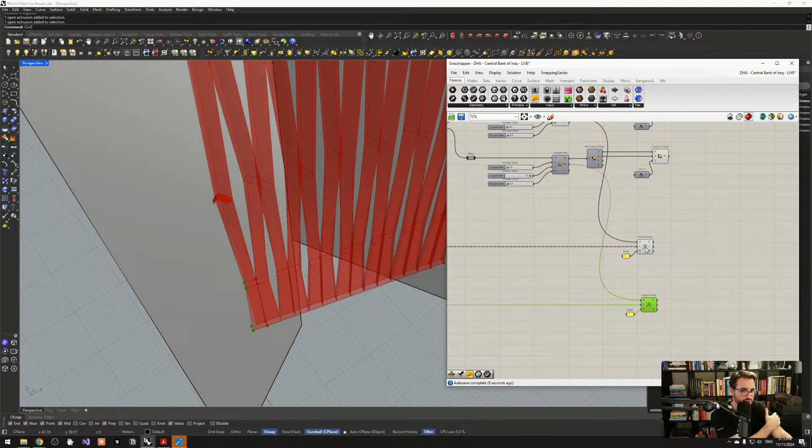So let's focus on the right side now. And these 2 points I want to project on the mirror plane, on this plane. Now we can make this bigger, let's say 4. So these 2 points I'm going to project on this plane, or on this surface.

But it is really important to set the direction of the projection. The direction of the projection should be aligned with this line. Do you remember how we can get this line? This line we can get if we take the base plane and we rotate that base plane. But the rotation angle will be the same as the one that we calculated once we rotated rectangles at heights 1 and 2.

So I will take the base plane, this one, and I'm going to rotate the plane. And here let's find the rotation angle. Rotation angle is here. Let's create a remote sender, rotation angle.

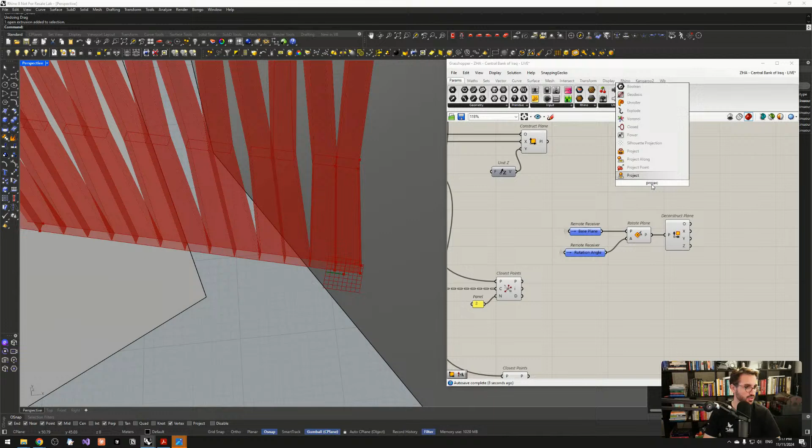So let's use project along, these 2 points, I mean these 2 sets of points. I want to project on this plane using this one, and we get the new position of the control points.

But how can we place these control points back into our list of control points that we have here in order to create a proper polyline? We're going to use this index of closest point. So I need to use these 2 index numbers in order to replace these points with the points that we get here. So there is a component, replace items.

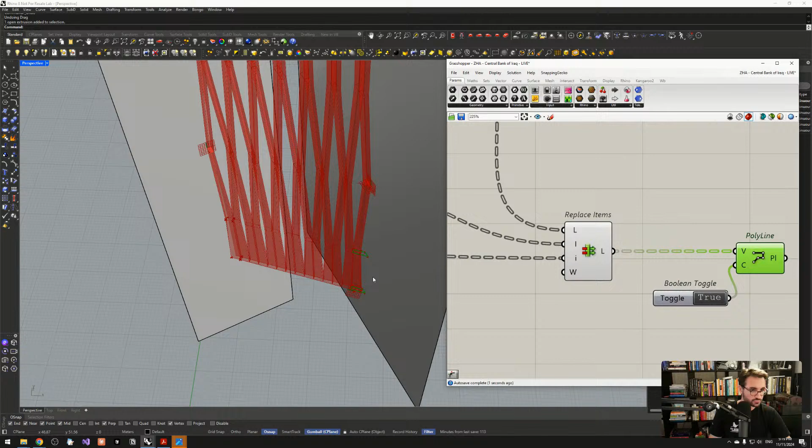So these items I want to replace, here is items to replace with, and here we have the index number, so replacement index for each item. And let's see what we get if we create a polyline. Right click and invert in order to create it closed, or you can use the Boolean toggle with true. And we managed to create these 2 guys.

Now the same thing we should do on the left side. So let's use replace, not replace, sorry, project along. So these 2 points I want to project on the plane, and direction will be y. Great. And replace, but we're not going to use this, but these control points.

So this will be the items, and the index we can get from the closest points.

Perfect. Now we need to position these polylines back to our list of polylines. So what we need to do, we need to replace once again, but in this case we need to replace items, and items will be polylines. Index numbers will be 0 and 1, and items will be these polylines.

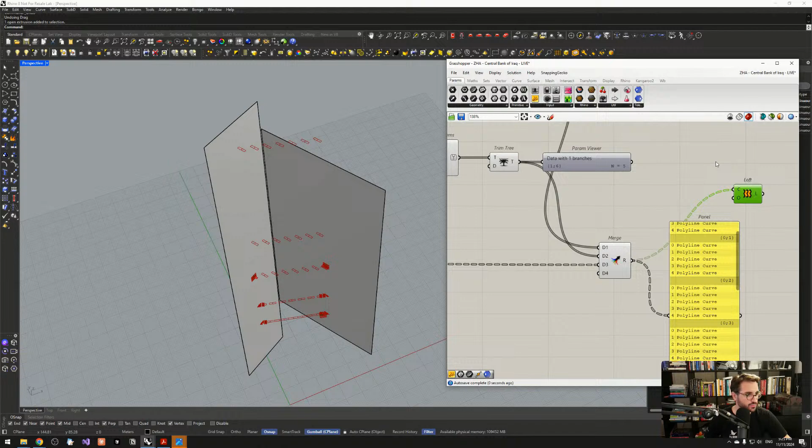Let's check. Okay. Let's see what we get. Now, if we loft, do we have the right result? Yes, okay, great.

Let's bake. Okay, you can see how we modify these corner parts on both sides. And if we mirror, there is no gap, and also here. So we managed to fill the gaps. I'm modifying the corner elements.

I'm going to select this group, and let's call this group adjusting corners. Adjusting corners, and this one can be called... no, actually this is also adjusting corners. Okay.

Now let's mirror. Let's mirror these vertical elements. Still, we are not ready to loft, so I'll use mirror, and one mirror plane is this one. Let's create a remote sender.

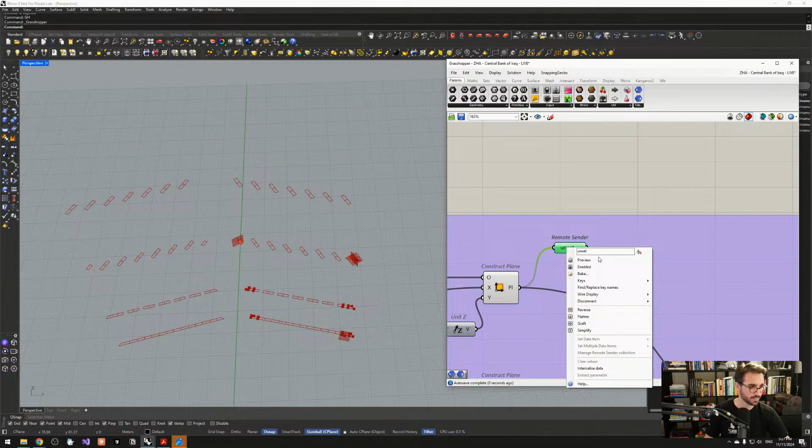Mirror plane 1. Oh sorry, not receiver. Rename mirror plane 2. Okay. Now we should use remote receiver, mirror plane 1. Great, let's place it in the entwine.

So in branch 0, branch 1, it is really important to uncheck flatten inputs. If we don't uncheck, all the items, all polylines, will be placed in one branch, as you can see here. By default it's checked, so we need to uncheck it, and it will preserve all the branches. So in each branch we had 5 items, and this whole structure is preserved and added with a new level. So let me just check here.

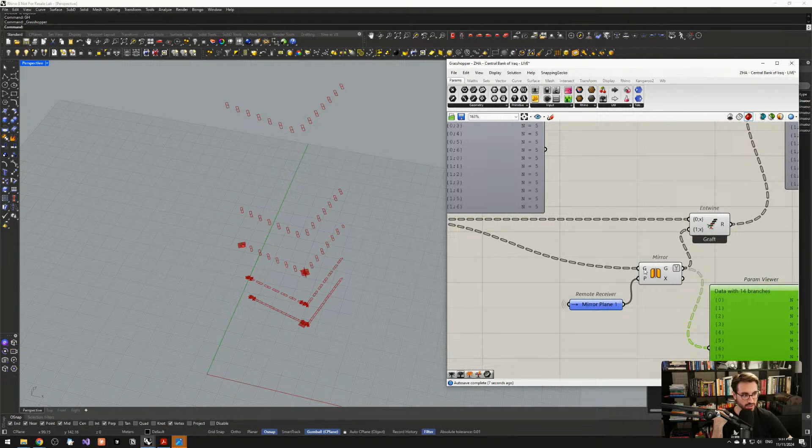Here we had a tree with two level branches, where the main path is from 0 to 1, and the second path is from 0 to 6. But right now, after mirror, if we simplify this, we'll get a single level data tree from 0 to 13. So how do we have the same data tree organization, the same data tree structure?

We need to right click here and check principal. It means the output will have the same structure as the input placed in the G. And now we get what we want.

Let's focus on the main curve you keep referencing. There is no main curve that we keep referencing. We keep modifying this set of curves. Or maybe I'm wrong, maybe I didn't understand the question. I mean, if there were one main curve we keep referencing, that would result in too many wires overlapping.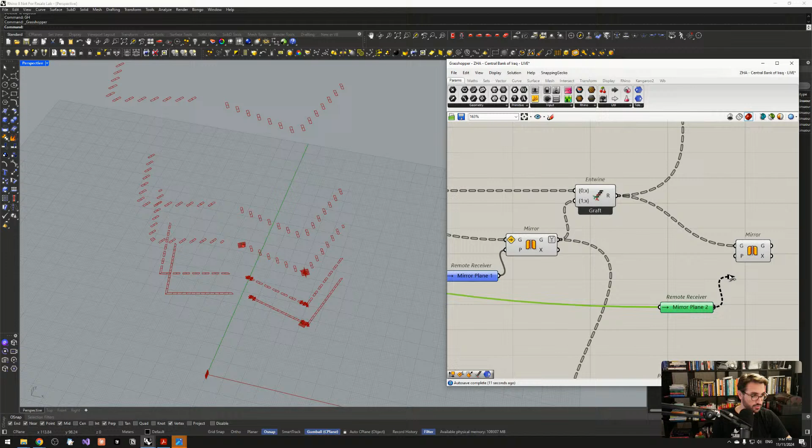Okay. And we mirror these curves, these point lines. Once again, I want to mirror. So this one I want to mirror, but I want to use mirror plane 2. Mirror plane 2. And we get point lines on the other side.

Once again, take a look at the data tree. Okay, now it's okay. Let me just check. Yeah, now it's okay. Okay, and now let's place an entwine to put them in the same data tree structure. So now here we have all curves.

Let's mirror. Okay, there is an issue here. Issue. Okay. This is okay. Okay, my fault. Previously I explained that we don't want to have flattened inputs. So uncheck flatten inputs. And now it's okay. Now it's correct.

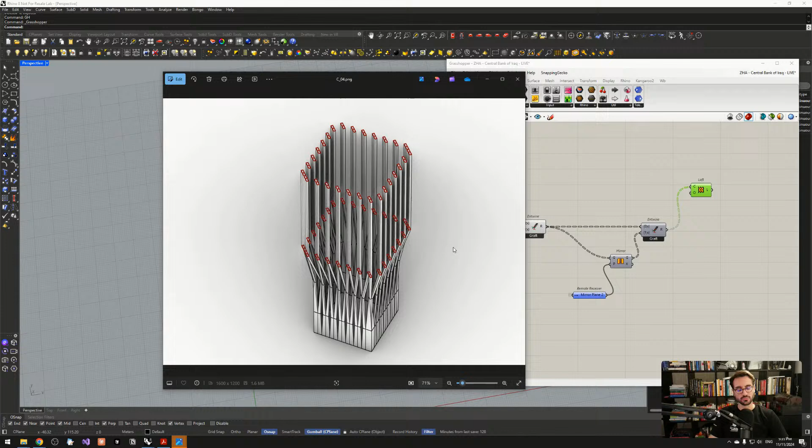This is quite straightforward. Also, this group I will call mirror. Okay. And I will select items 3 and 4. First, I will select either item 3 or 4, it's up to you. Because once we select these items at the same height, I can extract their centers, I can flatten the centers, and I will get a scaling center.

So let's just set here all paths, but only item 4. Perfect. As I said, this is quite straightforward. I will extract area, I will flatten the centers, scale. This will be the scaling center. Sorry. Area.

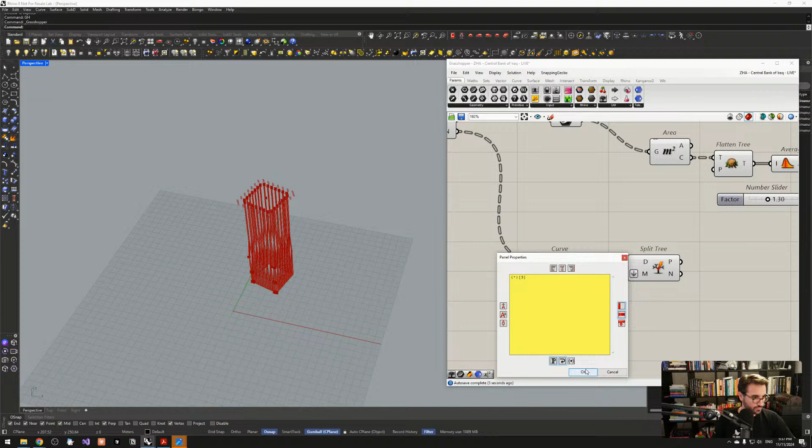And the same thing I want to do for the item with the index 3. So here we have the rest of the data tree, but from the rest, I want to scale only the item with the index 3. Same logic. Same scaling factor. Okay, and here we have unmodified curves. Combine them. Combine data. I'm going to zoom in here and add one more input. All right. Let's see what we get.

Strange sound from microphone. How do you hear us? Let us check. I mean, we didn't change this part. Okay, guys, can you describe what you are hearing? Are you hearing a different type of sound, like radio? Okay. Okay, now it should be good. How about now? Static on my end, noise. How about now? Is it better now?

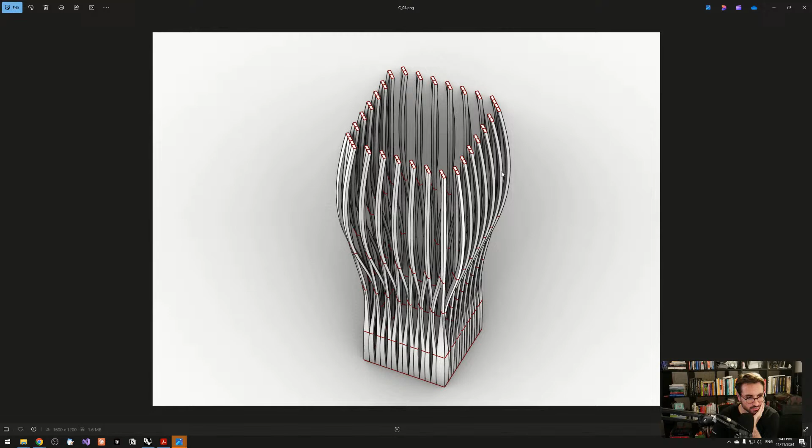Before we get to this part, I want to explain the logic behind this. So this is our geometry so far and our curves so far. If we take these curves and use loft, not straight loft but default loft, we get a shape like this. And you see what the problem is. I zoom in on this part and you can see overlapping. So there are two overlappings.

Here, which means we can use normal loft, but we need to have more control polylines, more polylines that will control the shape. So this doesn't work, right? So I will simplify. Let's focus only on this part. In this part, I tried to convert it into a drawing.

What we want to get is curves that go through these points. These 2 points are crucial. So we need to have curves like this and a curve like this. We cannot use interpolate because it will get a weird shape when it starts going through the next curve. So we need to add more control points.

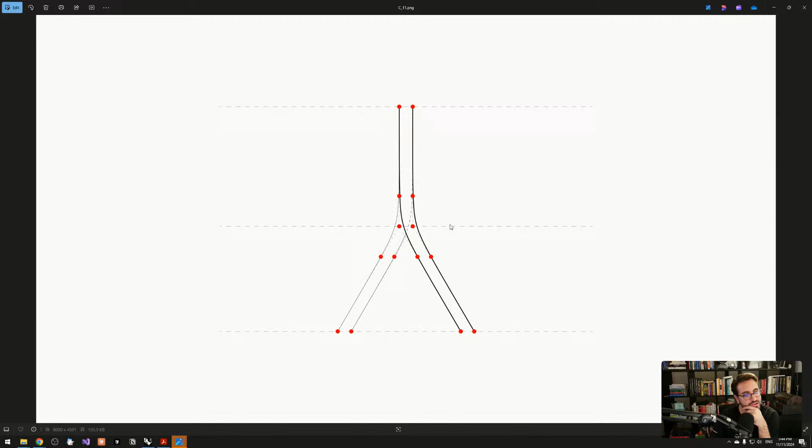So let's start: if we have only 3 control points, we get this kind of curves. But as you can see, these curves are not going through these 2 crucial points. If we try to add more control points, it's better, but still they're not going through these two control points. So the crucial part is to add control points that will be in the same vertical line.

If we add control points at this line, you can see here we added 2 control points, and see what we get. We get curves that go through these center points. Why these points are crucial: when you try to create a facade, it's important at each height, of the 5 heights that we have, actually the 3 heights that are in the middle.

Let's not focus on the bottom and the top part. These 3 heights in the middle, curves need to go through them. This is one of them. So what do we need to do? We're going to select these 3 curves, or these rectangles, at heights 2, 3, and 4, and I'm going to multiply them up and down, like I did here.

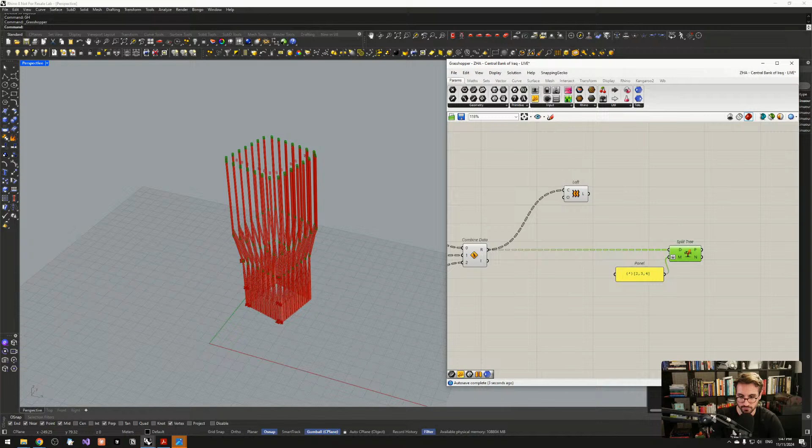Now I'm thinking why split tree will not be the best option. I should select here 1, 2, and 3. Split tree we use when we want to preserve position inside the data tree, inside the list. So let's say we want to modify these that I selected here. We modify them and we place them back into the data tree. But in our case right now, we're not going to modify them.

We want to duplicate them along -Z and +Z. So in total, we'll have more items than we have in the original tree. That's why split tree is not the right logic. We'll not have 5 items later. Let me calculate. Here we'll have 1, here we have 3, 3, 3, 1. So in total, we'll have 11 polylines.

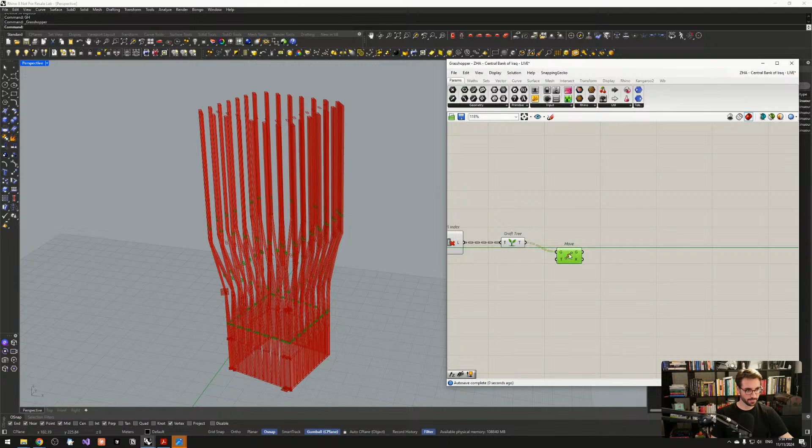So we're going to move with unit Z, and here we should have 3 amplitudes: minus X, 0, and plus X. X is the value for how much we want to move. The middle input will be 0, which means we want to preserve this one, and we want to copy up and down. Here will be a negative value, and let's set number 3. So we have -3, 0, and 3. You can see each of these polylines is multiplied up and down, keeping the original position.

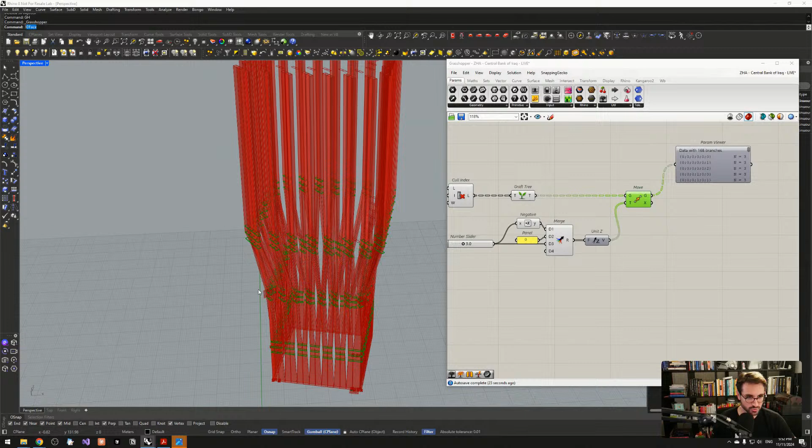Okay, right now each branch has 3 inputs. For example, this one and this one are in the same branch, but I want to have 9 items inside each branch: 3 from here, 3 from here, and 3 from here, so 3 from each height. That's why I want to trim tree.

So 9 items. Let's extract just one branch to see. So these 3 point lines are placed in the same branch. So I want to add bottom and top point line, and we can get it from here. List item. This will be the index. Okay.

So I'm going to use in this case insert items. So I want to insert items to each list, to each branch. So list to modify here, and items to insert will be these ones. I'm going to simplify to keep same data structure, and we need insertion index for each item.

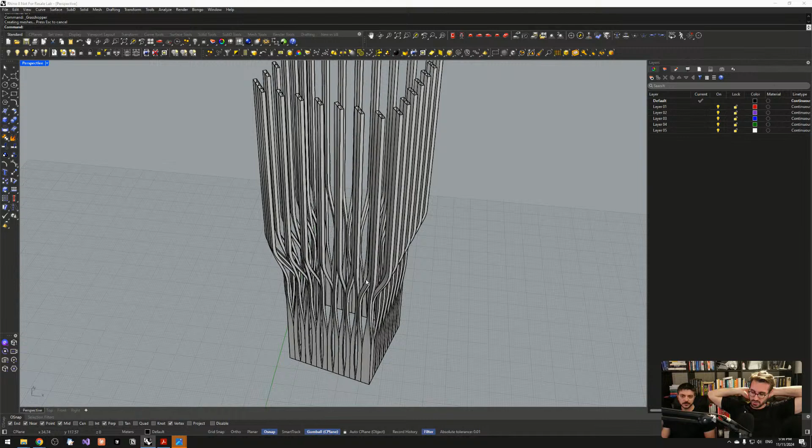All right, guys, this is where we're going to stop for this live session. Tomorrow we'll keep focusing on how to create facade, and I think this will be probably the most difficult part, how to create glass between these vertical elements. But tell me, what do you think so far about today's session?

Maybe you can show what's gonna be tomorrow. Yeah, let's just see the comments or the feedback from today's one. It's good. Few hiccups, but that's from my development. Yeah, I mentioned this at the beginning that it's probably gonna happen. Yeah. We also got a hiccup with the rotation part. Thank you for sharing your logic live. You're welcome, Walter.

Okay. So tomorrow I'm going to show you how we can fill this space between facade vertical elements. So I will show you how we can create pairs. So first we need to sort the branches, and we are going to create pairs of branches like this, and we're going to do it with path mapper. It will be a bit more advanced, this part.

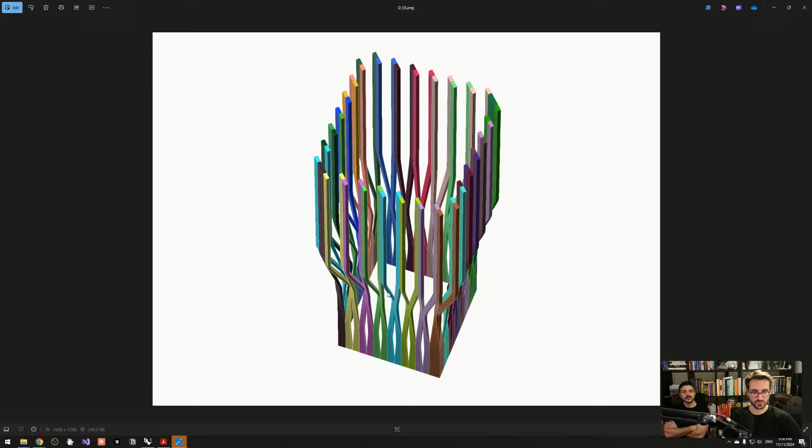And once we create these pairs, we'll fill the gaps, this part here. And after that, I will show you how we can create other pairs of vertical elements, filling this part. And we are going to merge these two results, filling these gaps between. So tomorrow we'll focus on this part. It looks like much, I explained it in just a few slides, but trust me, it will probably not be as long as today, but it'll be at least 2 hours.

Lots of different concepts covered in terms of data structure and data manipulation. Yes, even tomorrow there will be a big focus on how to adjust and manipulate data tree.